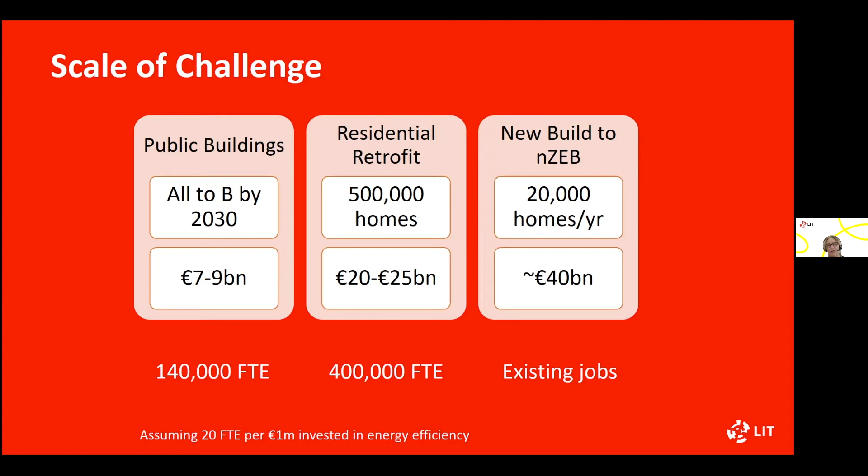So you can see there is huge potential for jobs and employment in this sector, but how we deal with it is the key. So there are multi-layered problems. Designing these buildings, getting the craft and construction workers to carry out the build. How do we manage to achieve this efficiently and effectively? Digitalization is one of the ways forward in this. Bear in mind when you're building or designing, you have to consider all the energy efficient changes and requirements and regulations, as well as the circular economy requirements, waste management, life cycle analysis, etc.

We need technical expertise. We need effective supervision and management. We need to monitor the works. We need to make sure everything's compliant, comparing the building performance gap, energy performance gaps from what's designed and what's being built. We need finance. How can people get finance? Not just for the construction workers, but also for the building owners and the homeowners. And of course, the customer journey. Never ever forget the customer journey, because the end product is for the client and for the occupants in particular.

So many of these workers need to be upskilled or newly trained. The customers also need to be made aware of what's going on, because a lot of people don't understand what's actually going on in the industry. So the workforce that is needed is to have new, updated skills.

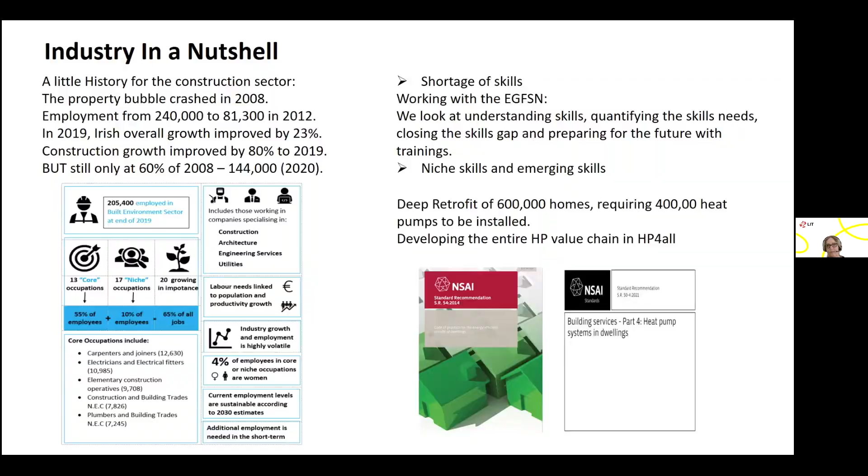So these are the key drivers. I'm possibly going to be going over time, so I'm going to have to speed up here.

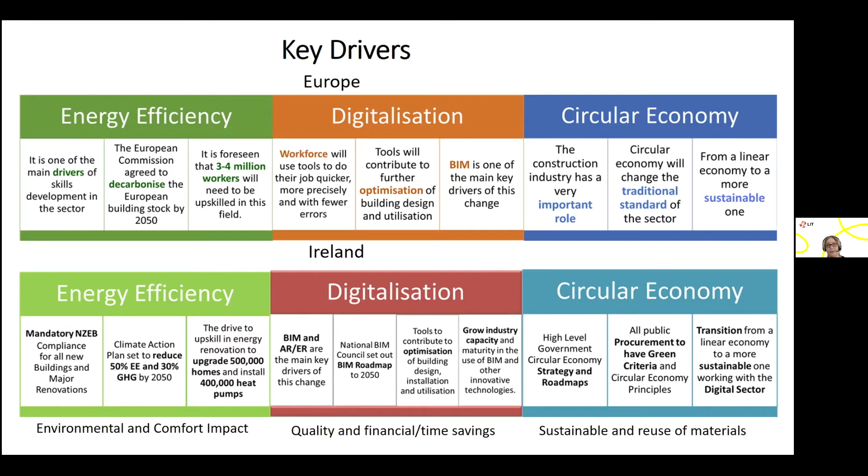For Europe, and I try to put it in the context for Ireland, significant drivers for energy efficiency with the Climate Action Plan. NZEB is mandatory, upskilling, major renovations of homes, as well as installing heat pumps. Digitalisation: for Ireland, we looked at the BIM roadmap using ISO 19650 and the tools for optimising these installations. And the use of BIM, AR and VR are the main drivers. And circular economy, the green criteria in all public sector tenders, so especially green procurement and tendering, that needs to be addressed, needs action in the digital sector to move this forward. So this is just a snapshot of all the different balloons which you can see.

But the terms of reference we used have been adopted now in Ireland, developing the ETBs, Education and Training Boards, at the moment. Huge backing from SOLAS to make sure that it's not just Waterford Wexford Education and Training Board that's getting the funding, all the other ETBs are as well. So the access for construction skills will be national. Now, HP for All, heat pump for all, I'll talk about that later as well, but that is mainly looking at heat pump design and installations. And then we have Superhomes 2030, which looked at deep retrofitting of houses. So the short trainings and micro learnings developed in BIMzeED, Construction Blueprint, BONRAS, BUSLeague and DASB will be presented a little later. And I'm going to apologise now for all these acronyms. There's so many acronyms we use in European projects.

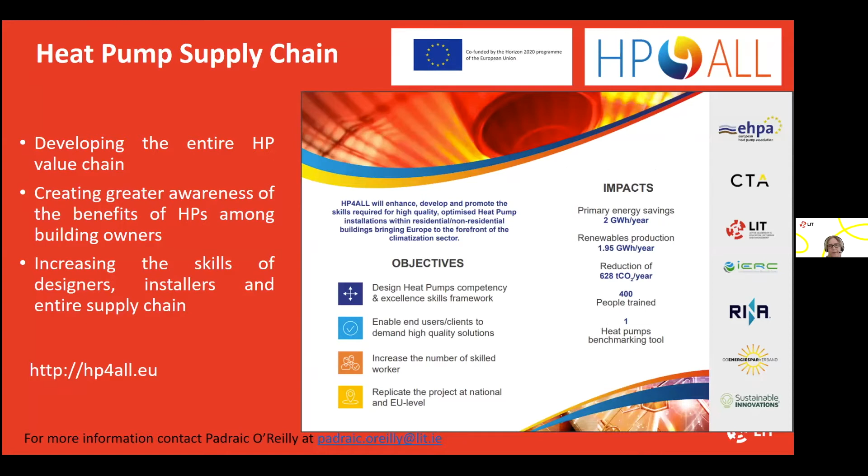And it's hoped to run in-house training. So if any large companies are interested, we're happy to assist. This training plan won't be ready till October. It's LIT's responsibility to get this.

So any help from the industry to help us develop this and work with other people on this, we'd be very happy to accommodate it. Just to note, there's also another green procurement project, Life Level project, which IGBC are running, and we're working with them. We're working on both these together.

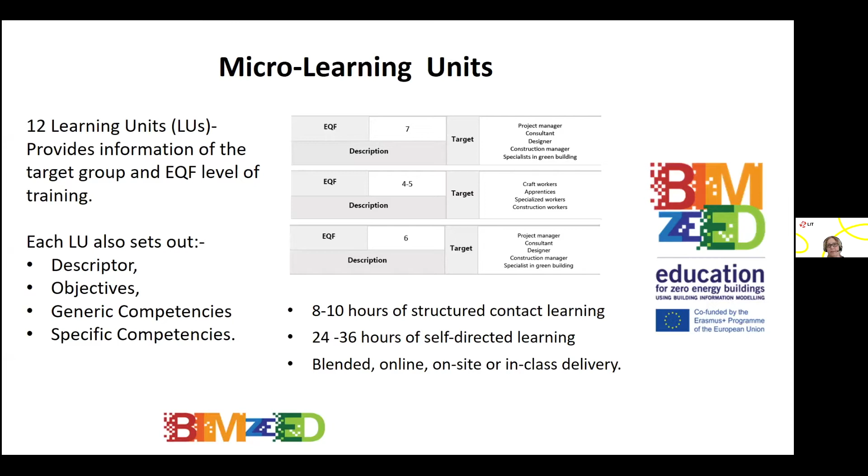So we have developed 12 learning units, all at different levels. And we use EQF, the European Qualification Framework. For our own national frameworks, we talk about levels 3 to 6. So they're short units with 8 to 10 hours contact and 24 to 36 hours self-study. And as I say, they can be delivered in any format that the training provider would like.

So after extensive research and surveys, a number of skills needs were presented, and we've chosen 12 of these topics as priority. Of course, there are other skills and knowledge gaps, and maybe we can develop them later in the future, maybe through DASB. So of the 12, 10 are available now, and the last 2 are available in April. So as you can see from the range, we do fundamentals, advanced use of BIM to achieve NZEB construction, specialised needs in facilities management, energy simulation and modelling, all at different levels.

So we're looking for trainers to run these learning units. Take a look at the website, bimzeed.eu, in the e-learning section and find out more about BIMzeED courses and for the trainers. If you go on the trainers section and complete it, you have access to all the material.

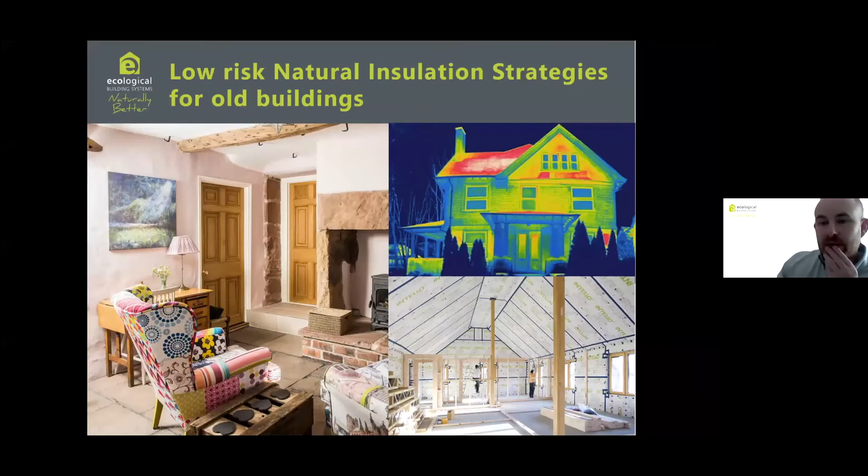Yeah, so first I'd like to thank yourself, Finola, for considering us today. I found your lectures very useful when I was in college, and I'm very grateful for the effort you had to put into us particularly. So I'm here to speak on behalf of Ecological Building Systems and myself, of course.

As a company, we supply natural building materials, and they often find their way into older buildings. So in this presentation, I hope to demonstrate some of the technical processes we use to support our recommendations to customers, homeowners and project developers, so that we can be confident that the risk is as low as possible.

Liz did mention there the scale of the task at hand, and Ireland does intend to decarbonise the entire built environment by 2050, which is of course to be applauded, but it's also a really big challenge, and there's a real possibility that some of these older buildings might fall by the wayside and quality might suffer, because out of the approximately 500,000 homes that have to be retrofitted, there's between 200,000 and 300,000 single leaf solid masonry construction type buildings. So they're quite vulnerable and quite sensitive to poor building methods.

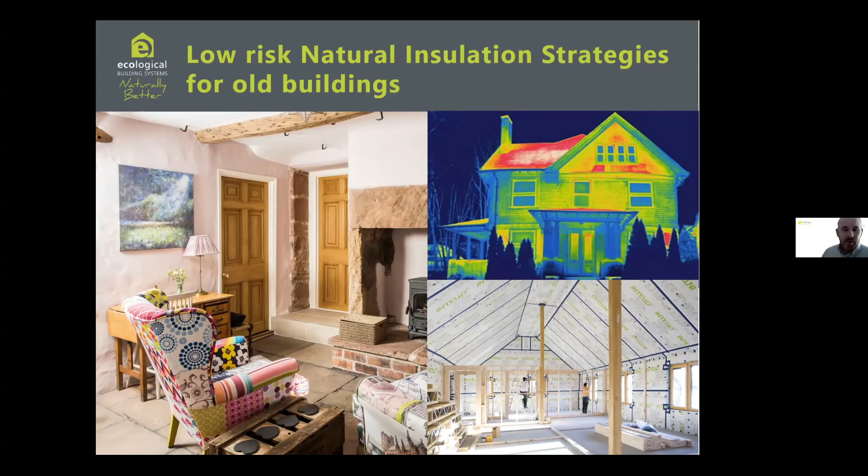So just a quick introduction of myself. I'm a former student of Finola's, and I spent a lot of time that I look back on very memorably with AIT and recently with TU Dublin. My background really is in energy performance in buildings, low carbon construction, sustainable design, things like that. And I'm also an NSAI certified thermal modeler and hygrothermal risk assessor.

As a company, we've been around since around the year 2000. We're born from a parent company that's been around since 1906. In those 2 decades, we've gained a lot of experience and developed a big technical know-how with plenty of material knowledge in these broad areas. In today's short presentation, I'll be looking at how we help people to build a plan with the right material type that suits a building. That's an important point because all buildings are very, very different. So no silver bullet will match every building type.

We'll have a look at the reason for the risk, which is moisture, particularly in Ireland, and its impact on traditional buildings. Then we'll look at how designers use hygrothermal risk assessment in accordance with EN 15026, the performance standard. It is the methodology recognized in BS 5250, the Code of Practice for Control of Moisture in Buildings. It's also recognized in NSAI SR 54 2014, the Code of Practice for Energy Efficient Retrofitted Dwellings, and in TGD Part L 2019 and by WTA, an International Association for Science and Technology.

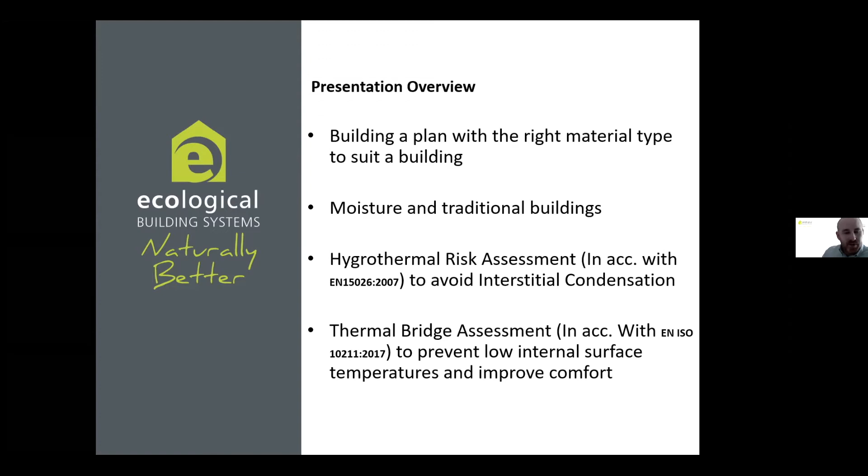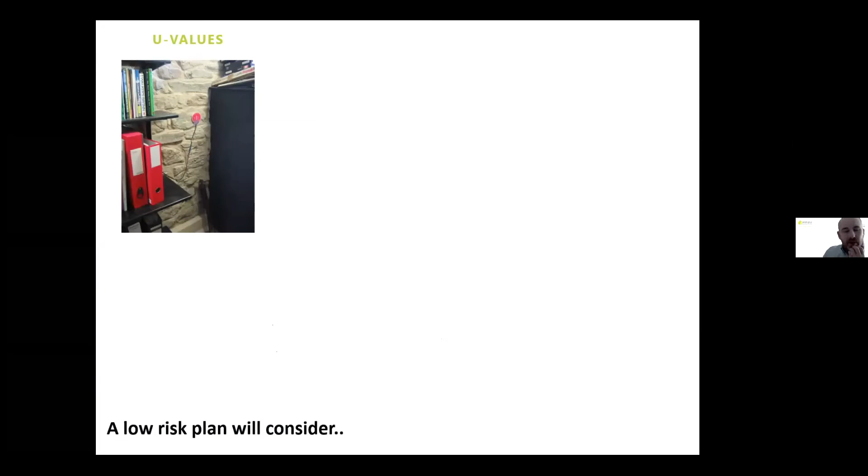So we'll take a look at how, generally speaking, a good plan will have to consider the U values, of course, but most people tend to put too much value on the U value. So a good building to them would be a building with good U values, when in fact much more comes into it. For example, where the heat loss might be going apart from out of the planar 2D elements.

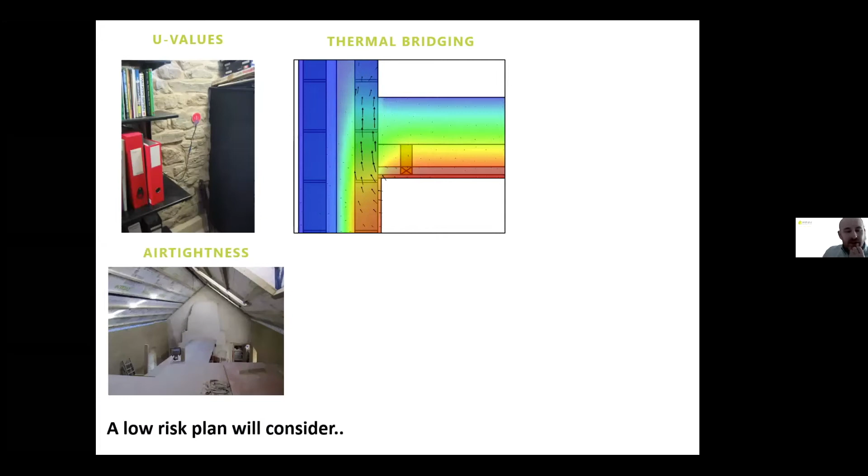Air tightness is a big consideration because it doesn't matter how good your U values are. If a building is drafty, it's going to be cold. Of course, the more airtight it gets, the more important ventilation becomes, and indoor air quality is linked to that. Fabric safety, learning how to know what's going on behind things. A huge part of heat loss is how moisture moves through buildings and where it might get up to no good as it does that.

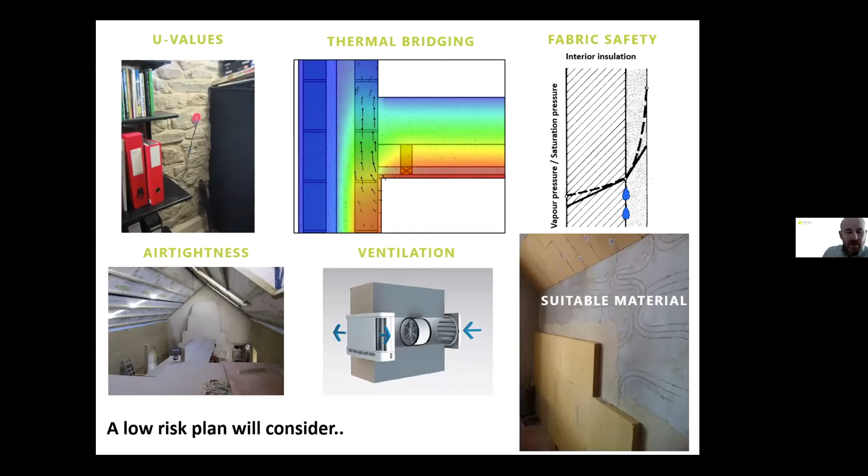And of course, trying to select a suitable material for the job, because not every material is the same. So a lot of people will say it's an old building, put something breathable on it. Well, if we take a look at this next slide, you'll see 3 very similar material types that we sell. So we sell wood fiber on the left, calcium silicate in the middle, and a cork and lime-based thermoplaster on the right. Now, it is true to say that they're all breathable, and technically maybe they're suitable in all old buildings, but you may have a case where you need to deal with excessive amounts of potential moisture.

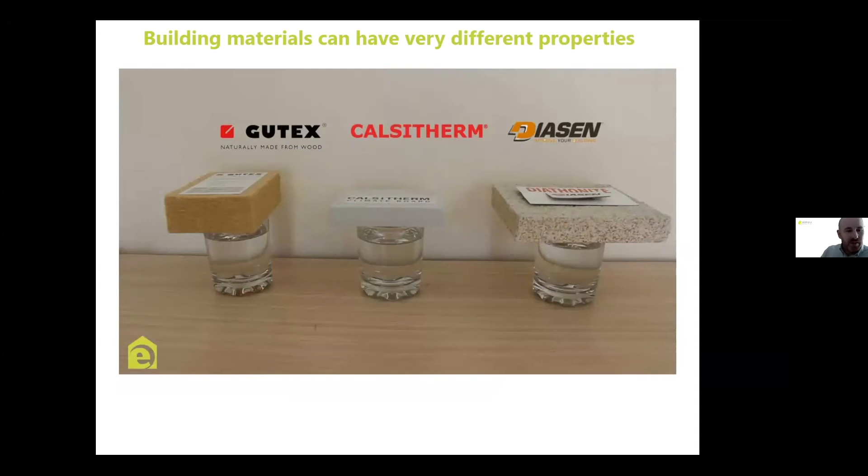Now, breathability refers to what a material can do with moisture in all its phases, so liquid, gas, ice, everything, and they all behave very, very differently from that respect. So I'll just play a short little clip and show you what I mean. This is a time-lapse video, and although they're all breathable, so moisture vapor will pass through them all, they all perform very differently with liquid water. So very often you might need something that would be referred to as capillary active, something that has the ability to store and transport moisture, to evaporate it when it's safe to do so when there's enough temperature and ventilation.

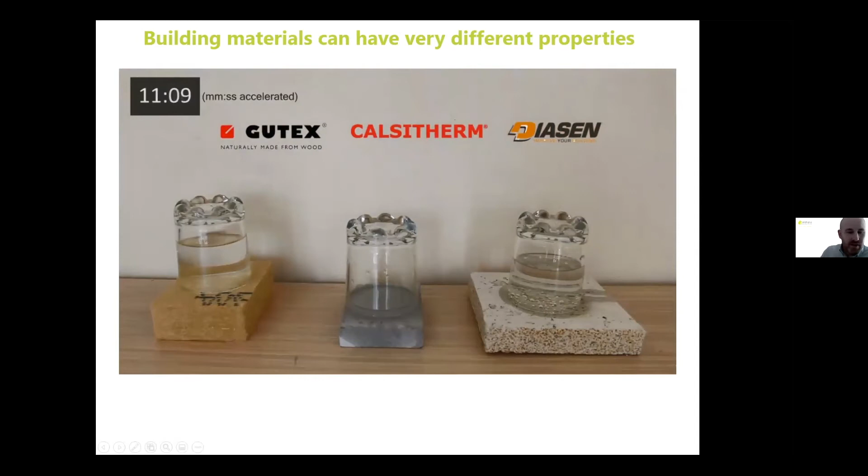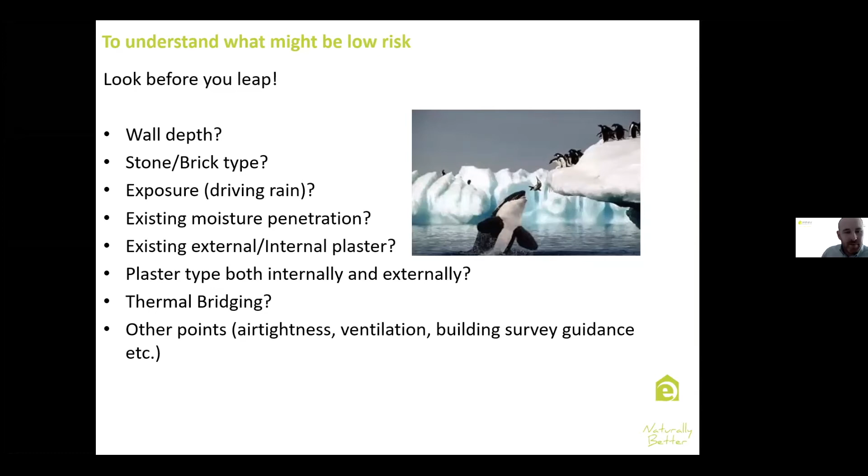So this is just a short sample to show you that even with building materials, there's a lot of technical characteristics that come with them that we need to be looking at more closely. So really it's just about building a good plan, figuring out certain things about the building. I won't go into all these in great detail, but knowing things about the building will help paint the picture and tell us what that particular building is, so we can have a holistic view of it rather than thinking that they're all the same, when in fact buildings are like fingerprints, they're all different. A good example of that would be, over the next 3 slides, I'll show you 3 old buildings, single leaf buildings, but 3 very different strategies were used.

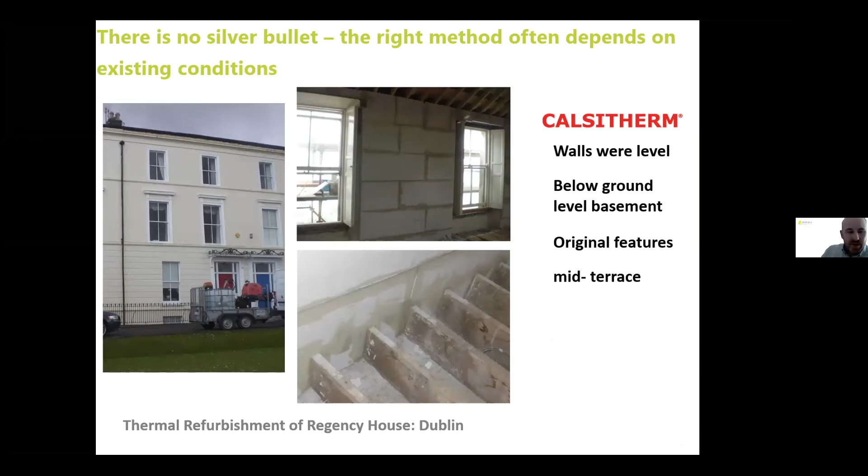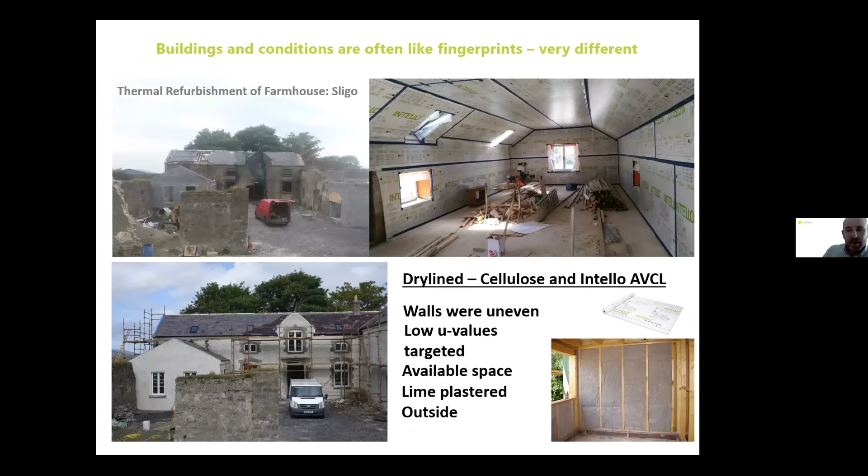For example, here in thermal refurbishment of Regency House in Dublin, they used Calsitherm because walls were very level, there was below ground levels, which was a higher degree of moisture needed to be considered, so they needed something capillary active. It had original features that needed to be worked around, and it was a mid-terrace dwelling. In the next building, we see a big old vacant barn type building that really wanted to target low U values, that had an external plaster on it. So it meant you could build a dry line inside on a very airtight vapor control layer.

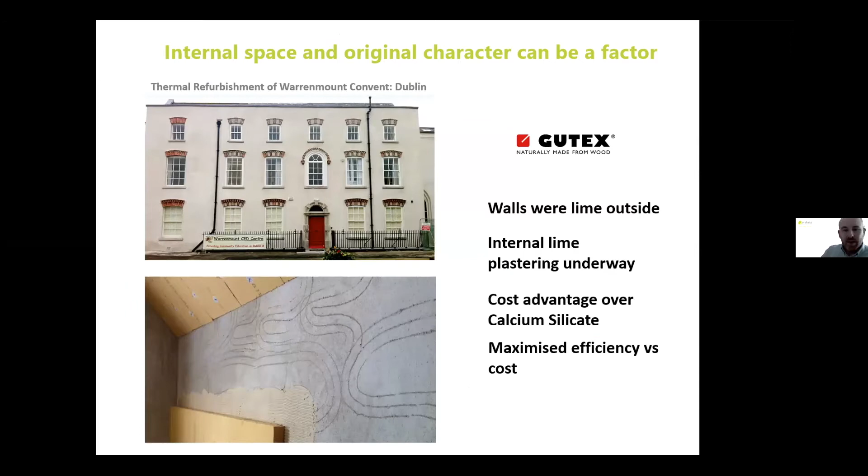Or for example, Warrenmount Convent in Dublin, where they had an existing lime plaster on the walls ready to go, and they had very well conditioned external plaster and features. So thermal capabilities of wood fibre in this case was considered optimal. Or you might have a wall where it's exposed stone. Now there could be a huge cost to level that stone with a lime so that you could get one of the other systems onto it.

So there are materials like our thermal plaster that you could just spray directly onto that exposed stone, and it's an insulation first and foremost. So it has very, very good insulating capabilities. It just happens to behave like a lime plaster. It's extremely capillary active and it's very breathable. Gives you the speed advantage of being able to do things at the right sequence after first fix electrical has been installed, covering huge area in a given day.

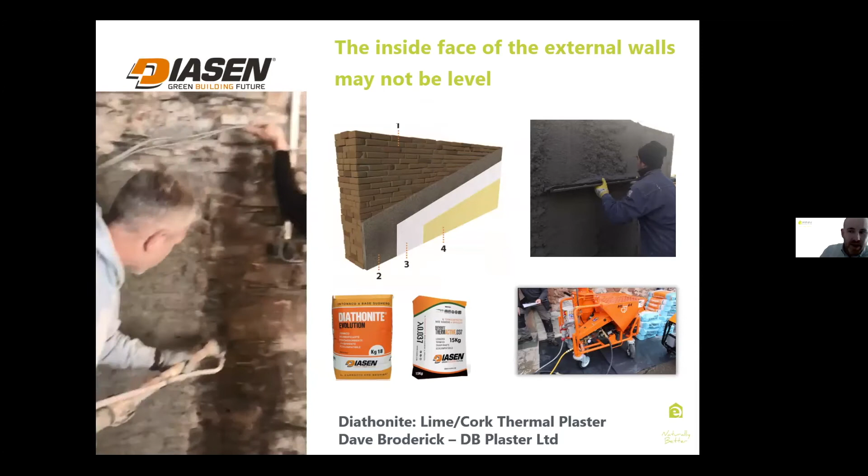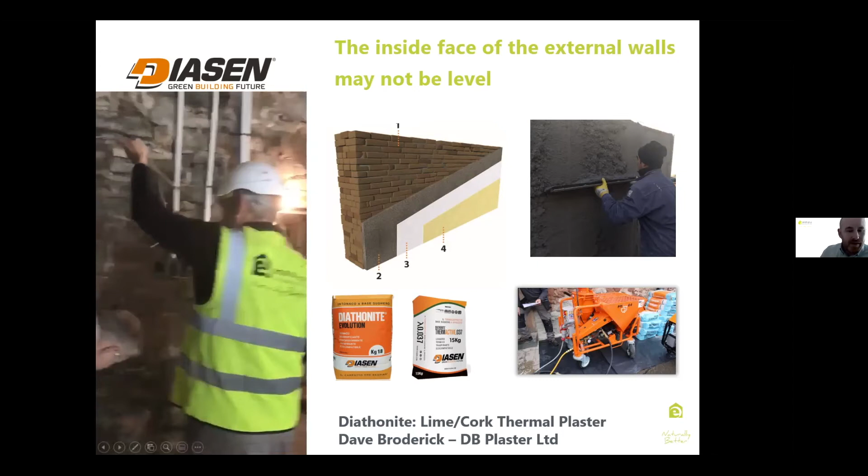So when those guys have the wall sprayed out to a given depth, that will equate to a U value, and then it's screeded off, skimmed and painted with a natural breathable paint. So as you can see, there's different strategies for different buildings, and you may have to consider the condition of the building also.

So a good example would be Dublin Civic Trust occupied this building, which is 18 Ormond Quay, and it's a fantastic example of how to retrofit a building to a very high standard. But in this situation, at an early stage, there were unsuitable surfaces, cement pebble dash needed to be removed, water goods needed to be repaired, external pointing and drainage and detailing needed to be addressed before it could be brought back into this century.

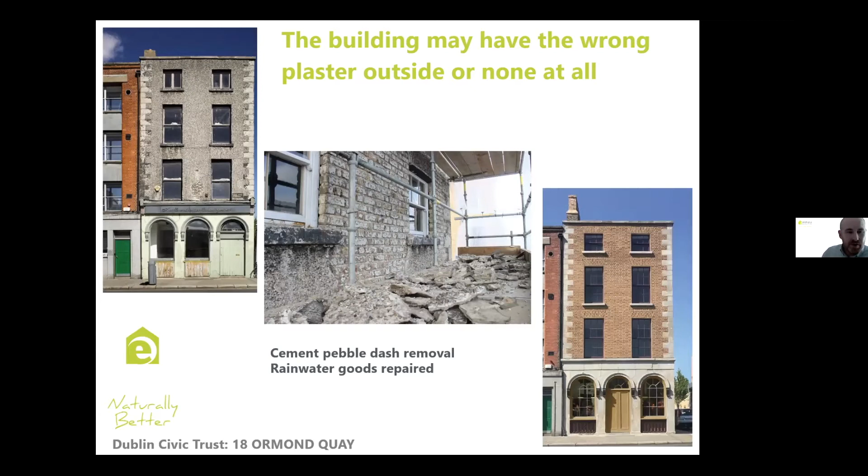And they did insulate some of the upper floors in that building with that thermal plaster that I just showed, and Calsitherm at the very upper level. So really what we're trying to get at is to avoid the issues caused by poorly considered retrofits. If you accept that figure from ASHRAE, 90% of building failure occurs because of moisture in some way. I would say that in Ireland that's probably higher, because in Ireland we have a very high degree of moisture at all times. And that moisture comes from everywhere.

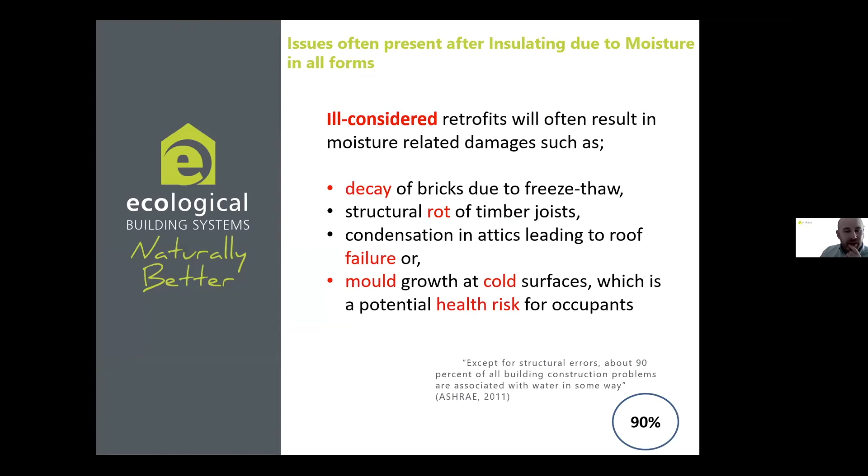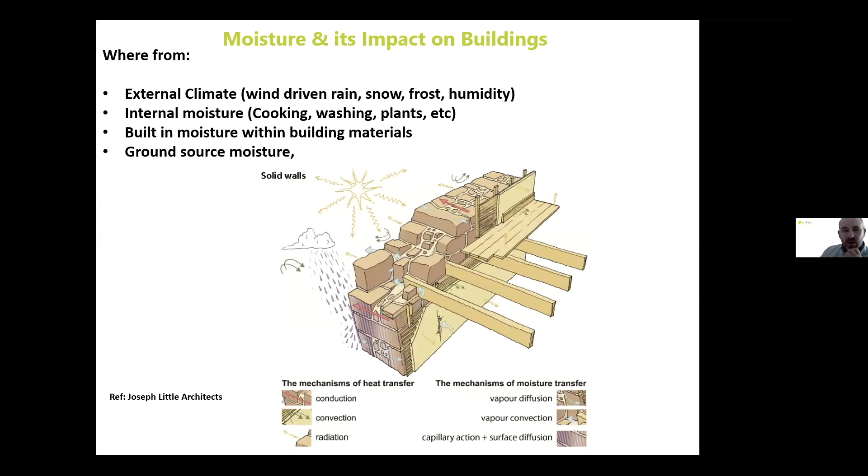This is taken from Joseph Little Architect's publication, and it just shows that we're constantly getting bombarded with rain, but moisture can come from the inside as well. So it can come from moisture vapor diffusing through a material or being carried by convection through cracks in the openings, where it gets into the colder structure and then begins to condense and cause all kinds of problems.

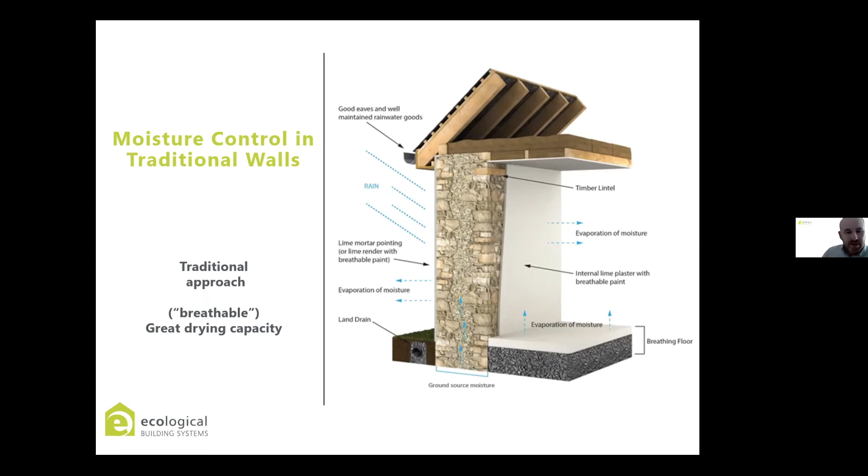Now, in the past, the way we used to build used to allow us to deal with that. So we used to build in this vernacular way, where we had good land drainage, we had great surfaces, lime plasters, we had well-maintained rainwater goods and breathable surfaces internally. And a building like that would have a high evaporation profile. It would be able to dry to inside and outside. So yes, it would get wet because we're in Ireland, but it could also dry. So it was constantly in this cycle of dealing with that moisture. And that moisture is ever present.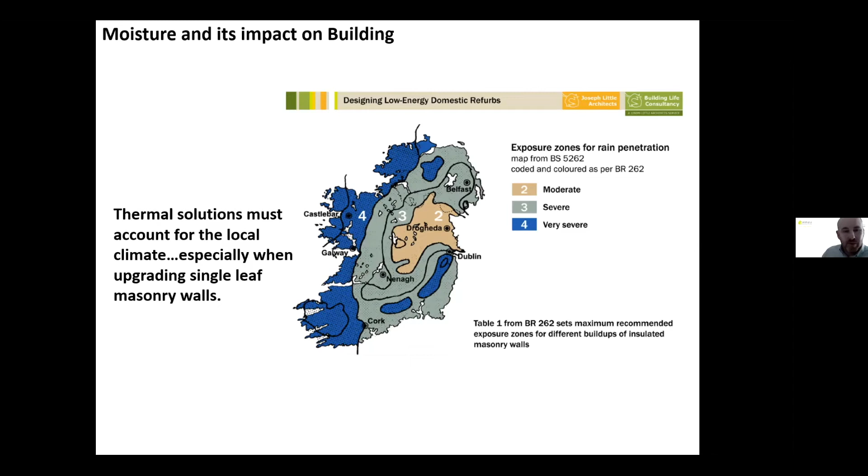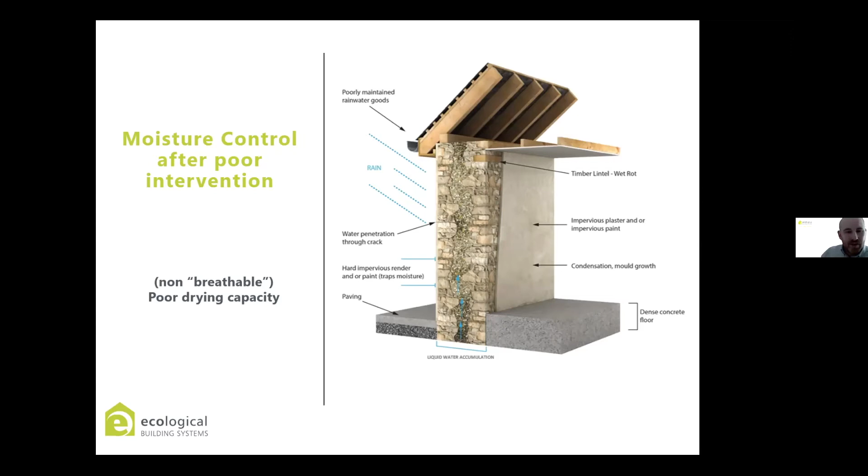And when you apply poorly installed building materials, things that are unsuitable on older buildings, like for example, you replace the good drainage with paving outside, or you have concrete surfaces placed internally on the floors, or you apply cement renders to the walls, what happens when water gets into that wall is it begins to accumulate, and it gets worse and worse, and then you get blown plaster, cracking, interstitial condensation, rotting timbers, and the fabric safety gets worse and worse. So the same thing is true for boards.

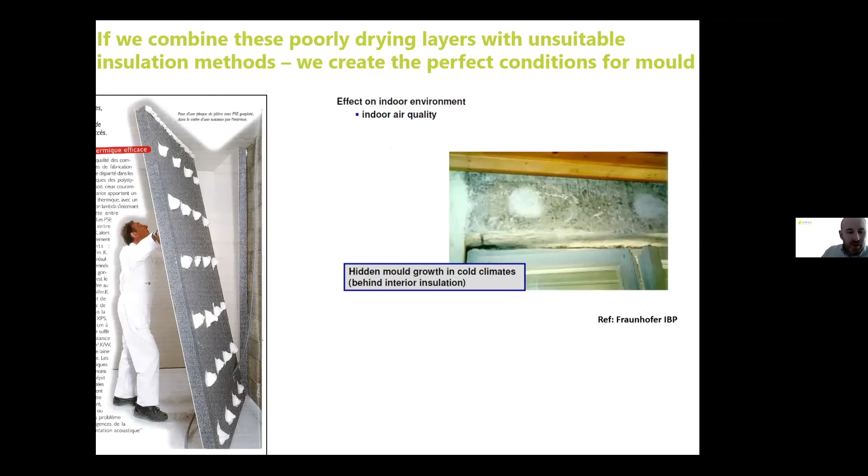So this board, being a phenolic type insulation pressed against a wall, has the ability to potentially trap warm, moist air behind it, creating the perfect conditions for mold to thrive, which is what happened in this situation behind an ill-conceived dry line with a plastic membrane that had gaps in it, that wasn't airtight, had cold surfaces and gypsum plaster, providing a good food source for mold and nutrients.

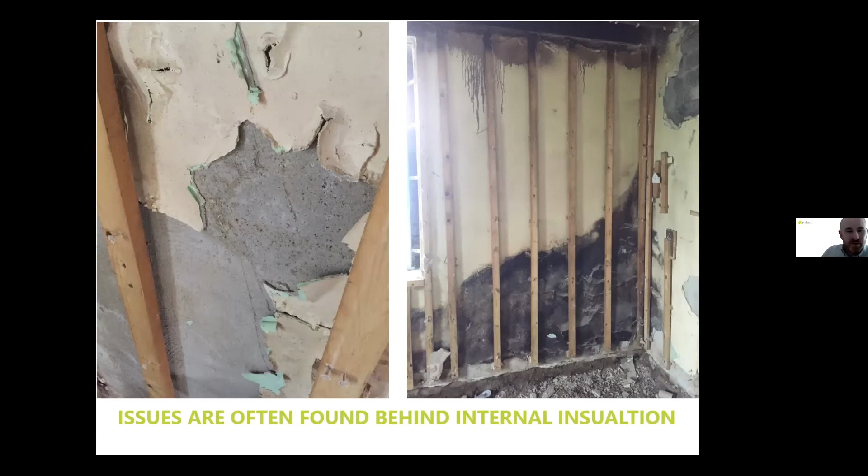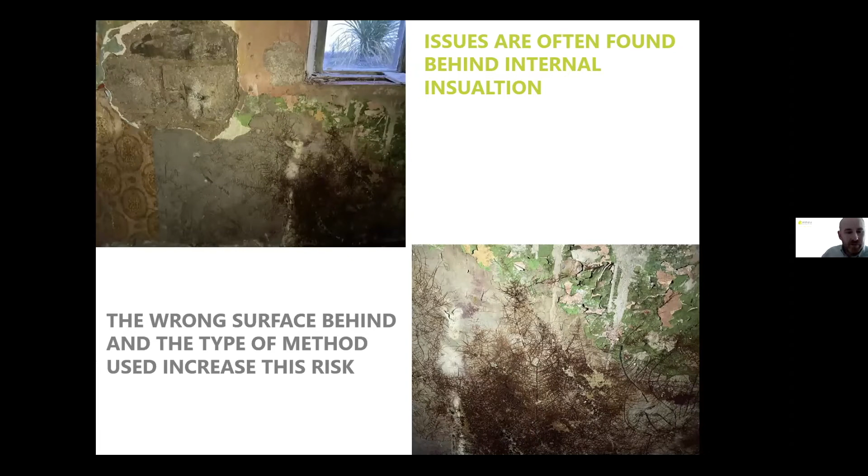Likewise, in this building that I was in 3 weeks ago, this is an old gate lodge where behind the kitchen units, there were voids created behind some really badly fitted insulation and an old gypsum skim plaster that shouldn't have been there in the first place. But it just goes to show you that warm air will find its way in. It'll always condense on the first cold surface it meets. And if you give it those conditions, it will thrive. So this is what we're trying to avoid. So one way of avoiding it is not to build dry lines off walls.

Don't leave space behind insulation like it shows in this image, unless the space is completely ventilated to the outside, top and bottom. And you'd have to do that in multiple locations. And even at that, you're kind of hoping for the wind to be blowing in order for there to be an air transfer behind insulation.

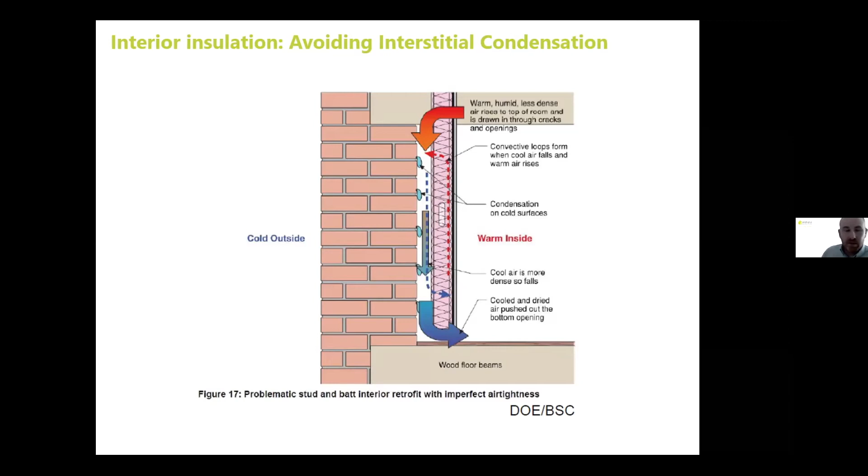But if you don't have a ventilated space there, what will happen is warm air leaks in behind the dry line. The red arrow shows that at the top. And as it gets cooler, it begins to get denser. And as it gets denser and cools, it loses its ability to hold that moisture. So it releases it on the cold surfaces, which is what we saw a minute ago. Things like this occur in an unventilated space. So we need to avoid stagnant air gaps and pockets behind insulation.

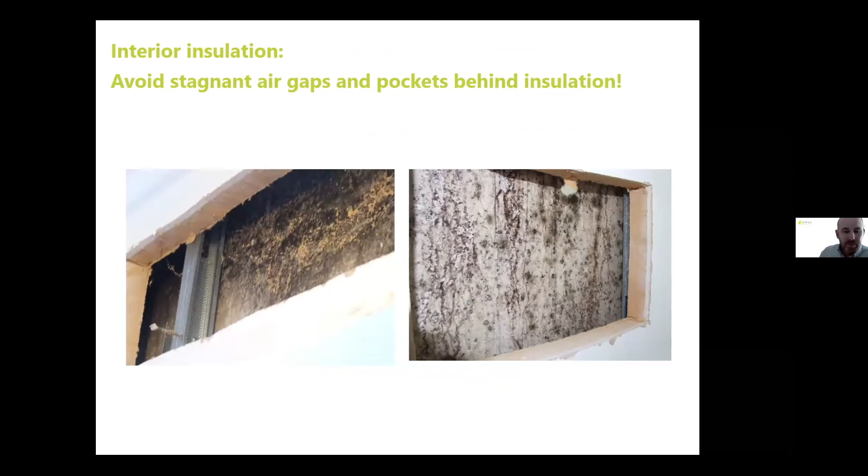So of course, it's more than just wishful thinking and hoping we're doing the right thing. As a company, we use this methodology. We use WUFI numerical simulations, and we carry them out in accordance with EN 15026, which is the convention mentioned in Part L and NSAI SR 54 2014, etc.

It's a computer-assisted simulation program, a dynamic software where you can perform a transient model and input data about real-life climatic conditions, day and night temperatures, time of year. You can run this model over 10 years, 20 years, to see what happens, to draw a picture and to gauge what type of risk a certain strategy might have. So it's a very useful software, and it's done in accordance with EN 15026, which provides much higher accuracy than a standard dew point method, which would be carried out to EN 13788.

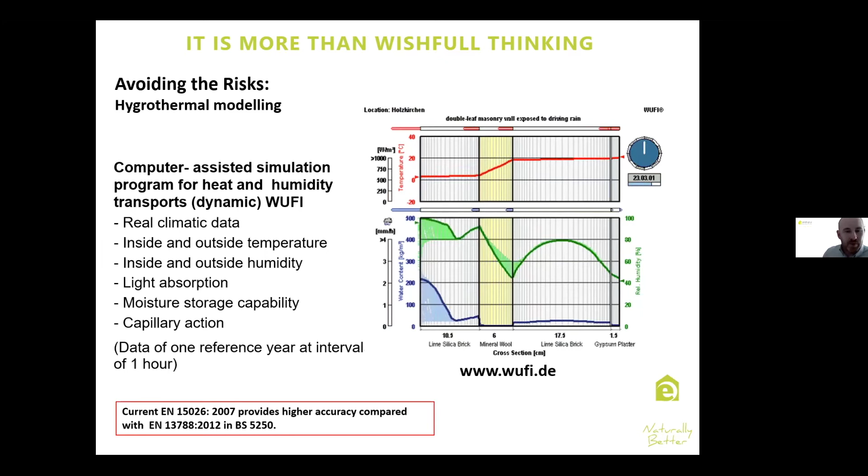Dew point can only tell you what's happening when vapor moves from the inside to the outside. So it's completely ignoring everything else: the storage capacity of the wall, potential defects in the fabric, temperature variations and fluctuations. It can't cope with that kind of thing. So this type of method is much more robust.

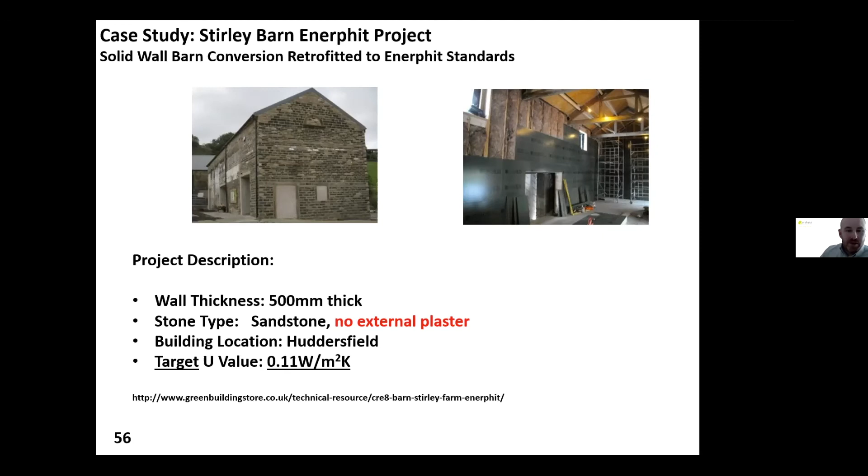And just to show it in a real life situation, this is the Stirley Barn Enerphit project in the UK, where the U value targets for the walls were very onerous, 0.11, which is very low, past the standard U values for an internal wall insulation strategy. The look of the building was very important, so they couldn't insulate it outside. So the only option really was to build a big frame, insulate it internally, essentially creating an internal timber frame off the main structure. But the real question was, did that space between both need to be ventilated?

Because it had an impact visually on the outside of the building, it had an impact on cost, it had an impact on even the daily arguments that would go on site, things like that. So the only way to really assess this at an early point was to take a look at it on a dynamic simulation using WUFI. And on the basis of no ventilation in the cavity, you can position probes virtually in the software, and you can monitor a certain position.

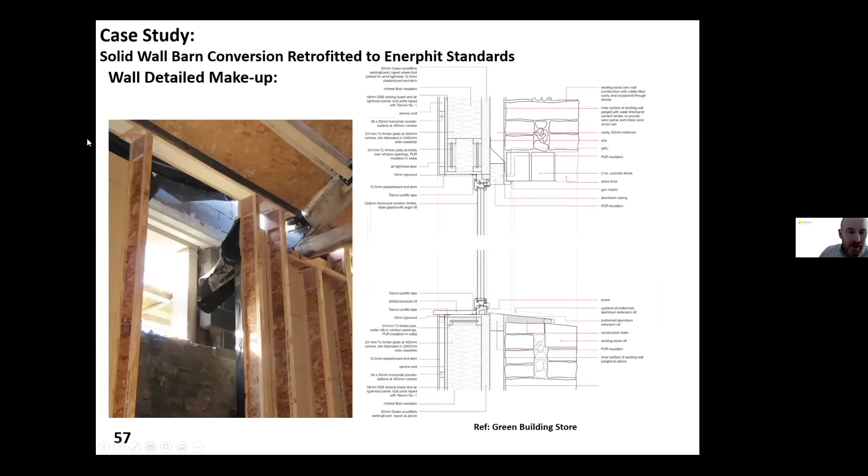And the main position of interest was the wood fibre at the back of the frame. I'll just go back to it for the moment. On the back of that frame, you can see wood fibre is positioned. It's the secondary insulation layer before it meets the stone wall in the space. So positioning a probe on that virtually, on the basis of no ventilation in the cavity, we carried out this numerical simulation with WUFI, and we monitored the moisture content of the external wood fibre.

And without ventilation, its moisture content increased to over 44% after only 7 years, which indicated a really high risk of failure. Because with wood-based products or wood, you're starting to get into that dangerous territory once you hit 18%, 20%, 22%. So again, this rose to over 44% in only 7 years.

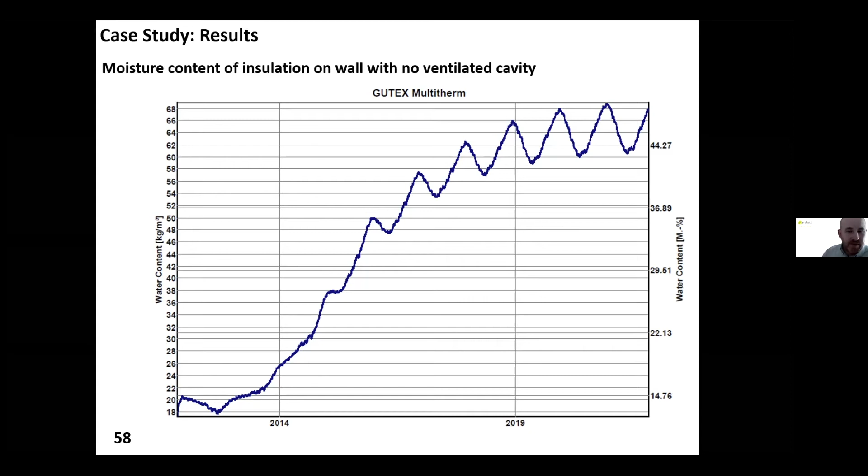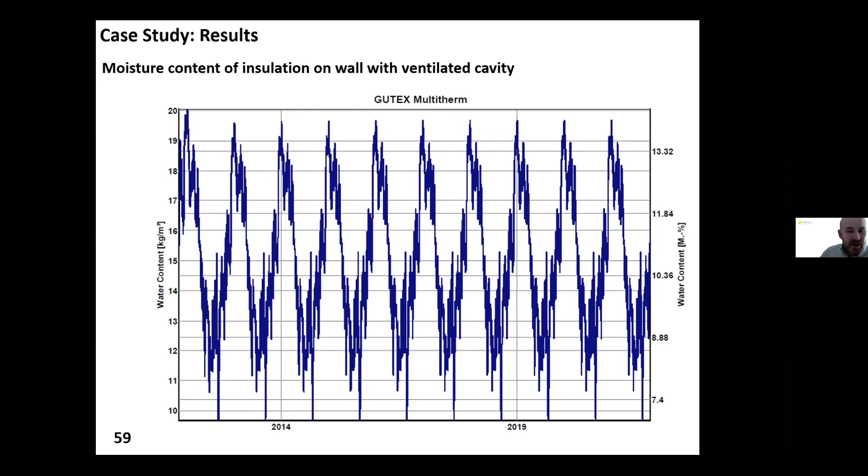By simulating ventilation in that space, on the basis of including ventilation in that cavity, we carried out the same simulation. And with it, we found that it remained at a really stable 10.5% average for 10 years of the calculation, which indicated a really high level of safety. So the inclusion in this case of a ventilated cavity proved crucial for that specification.

So again, a part of eliminating defects internally is ensuring that you don't get cold surfaces, for example, an uninsulated reveal, and that you have sufficient ventilation, because a combination of poor ventilation and high humidity will always result in surface condensation and mold growth.

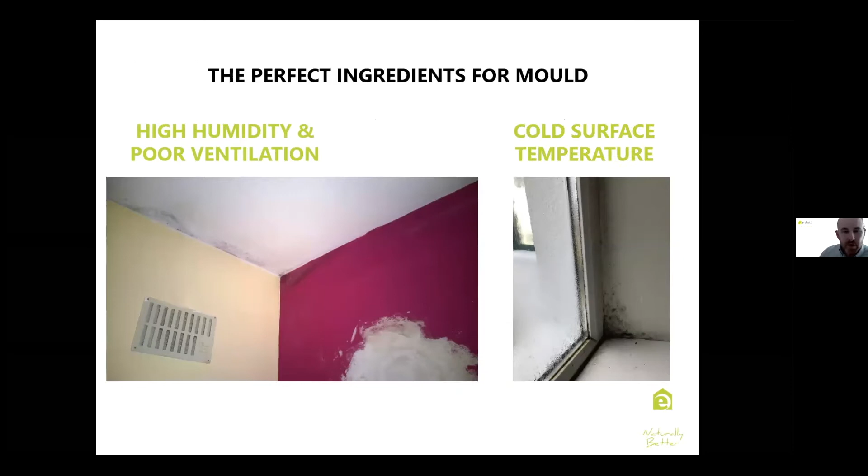So if we take a look at an uninsulated wall, and this is where thermal bridge assessment kind of comes into it, an uninsulated wall will lose heat very uniformly. So those little arrows or the vectors are showing that when it's 20 degrees inside and 0 degrees outside, heat just gets lost through every surface, and every surface is cold as a result.

Now, what happens in very old, inefficient buildings very often is, you're drying clothes, you're making dinner, you're having baths and things. So there's high humidity in the space, and it condenses on these really cold walls, sometimes running down the wall, presenting as what some people think is rising damp, but it's being misdiagnosed. It's actually surface condensation. Things like salt defects can present as a result of the high humidity on the surfaces. So you get this in old uninsulated buildings.

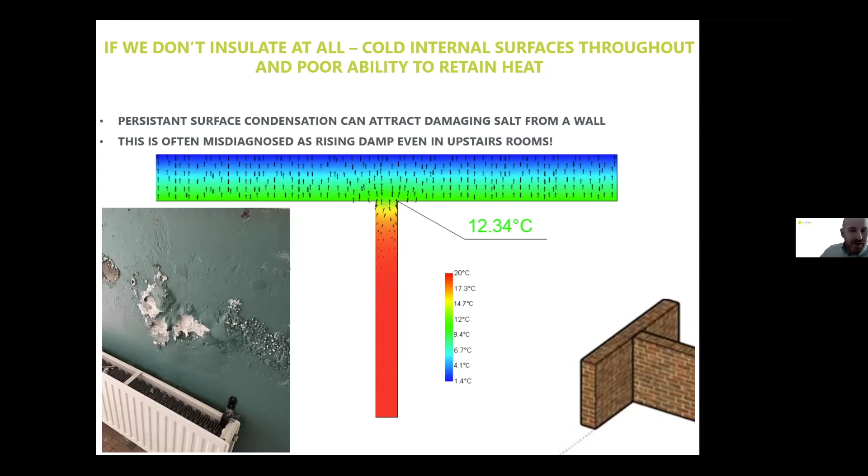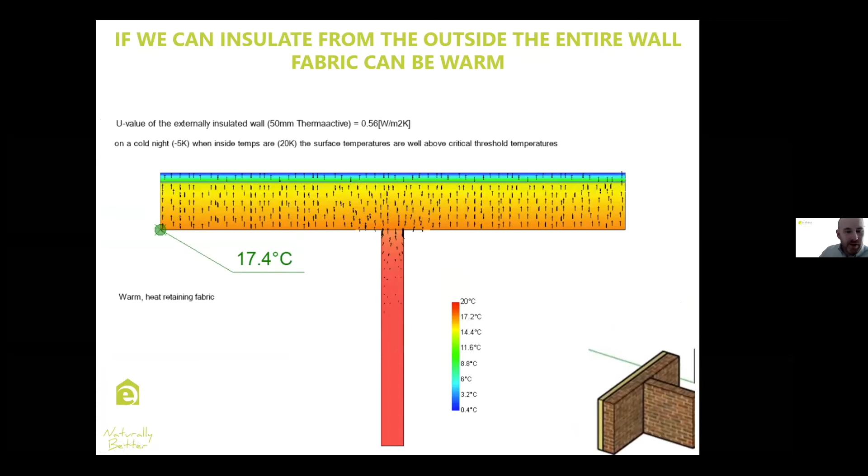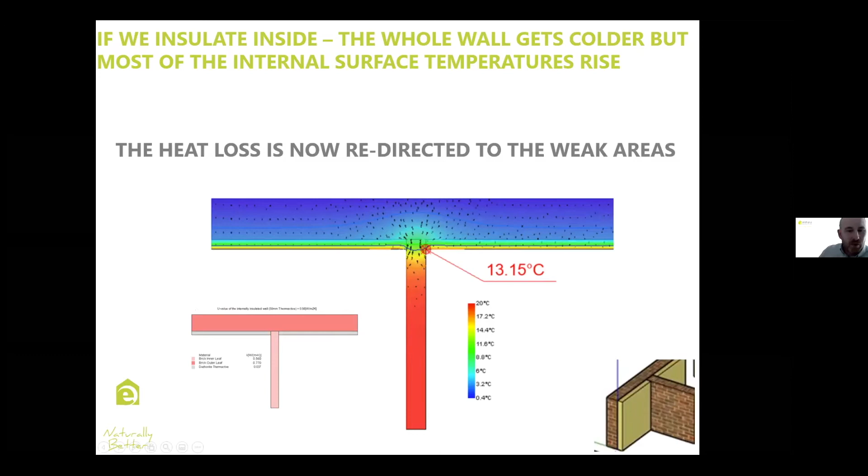So really what you're left with is internal wall insulation, or IWI. And if you insulate internally, very often what happens is you magnify the heat loss in other areas. For example, that intersecting internal wall where it structurally ties into the external wall. So notice how the vectors have really shortened across the wall. The wall has got colder as a result of less heat getting to it. But as you move towards that middle wall, you see that the vectors are sort of rushing out. So the heat is rushing out in those areas. So you can often get mold growth in corners and at ceilings as a result of IWI being poorly planned.

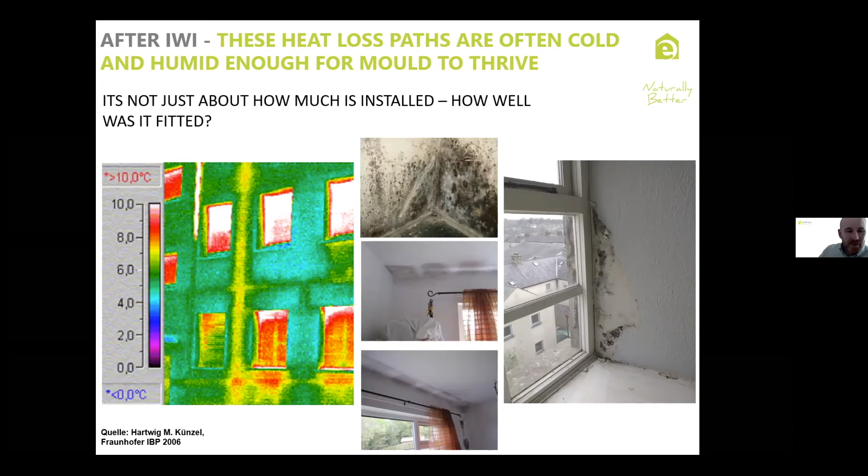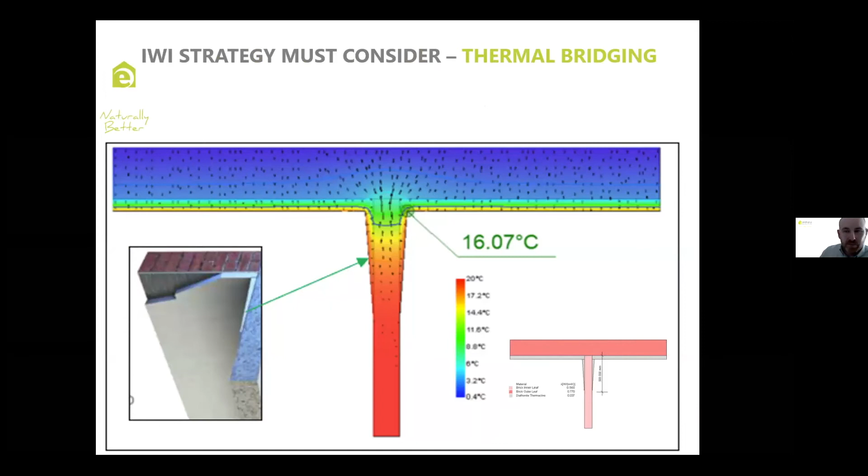Things like this and the thermographic image outside the building would show what it looks like from the outside on a cold night, and the spots on the walls are as a result of not being able to detail thermal bridging correctly. So often with IWI, we have to go that one step further. We have to insulate, in clever and aesthetically pleasing ways, into the hard to reach zones, the areas that might be influencing heat loss overall. The difficult to do areas are the ones that really make the difference. But we have to try and join the dots between what's upstairs and what's downstairs. We have to get into those zones and detail for air tightness as well in order to make the most of an internal wall insulation strategy.

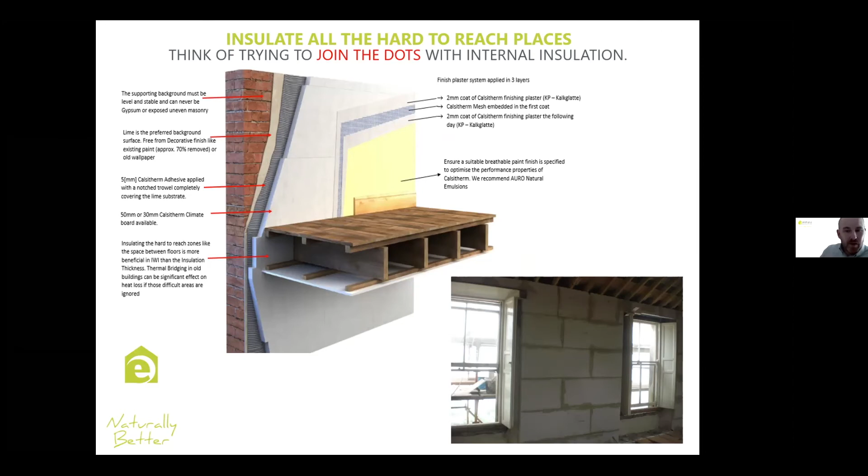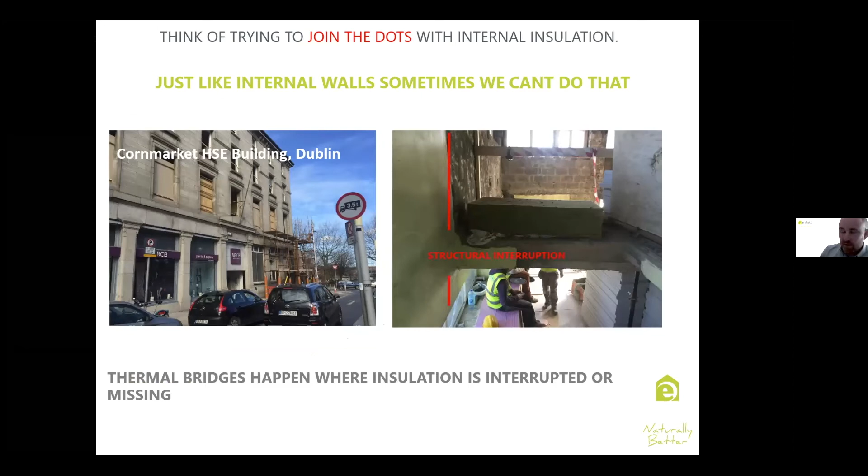This happened in this Cornmarket building in Dublin, which is the HSE building. And on this site, a colleague of mine noticed that if they insulate above and they insulate below, there's a natural structural interruption running right through both insulations. So joining the dots in that situation is difficult. Looking at it with thermal bridge assessment, we were able to predict that there will be a low enough surface temperature as a result of insulating above and below that it might actually fall below what's considered a critical threshold, which is often referred to as the FRSI value, or 15 degrees. So in this case, we found a temperature of 9.4 degrees.

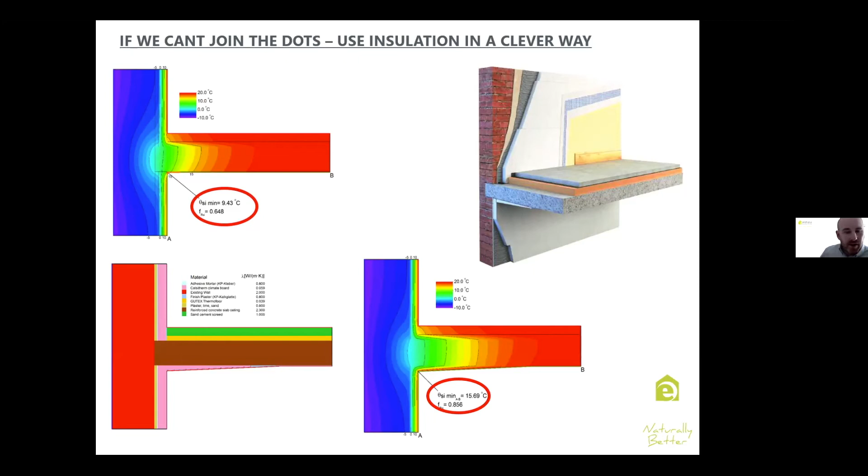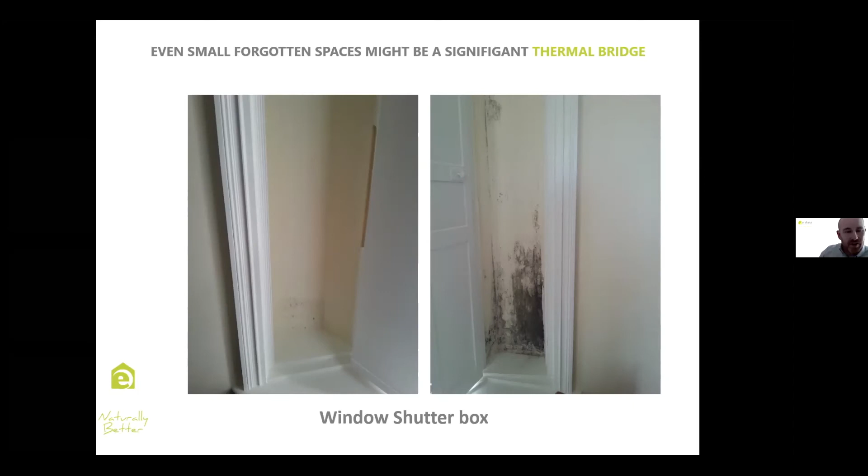So it was proposed that they insulate beneath with a tapered board. And in fact, they just used the normal board because there's a drop ceiling going in. But it was found that by doing so, they could elevate the temperatures to over 15 degrees, creating a degree of safety. And again, even leaving out things like window shutter boxes can create the perfect conditions for mold, because you'll end up getting heat rushing into that area, trying to get out, creating those cold conditions. So the idea is come back, clean it off, insulate into it, and that will cure that issue.

So really, that's the end of my presentation. And just to conclude, it's worth noting that you can't cover everything in one presentation, but each retrofit case is different. So a holistic approach is required, especially if we're going to meet this task head on and do it without affecting our older buildings. Moisture in Ireland is always a risk. Natural materials share many of the performance attributes that old masonry construction requires. So capillarity, high pH, so it's caustic to mold, breathability, good thermal ability, things like that. Using hydrothermal risk assessment EN 15026 can help guide decisions and make better decisions.

Detailing out thermal bridging will help prevent low internal surface temperatures and improve thermal comfort overall.

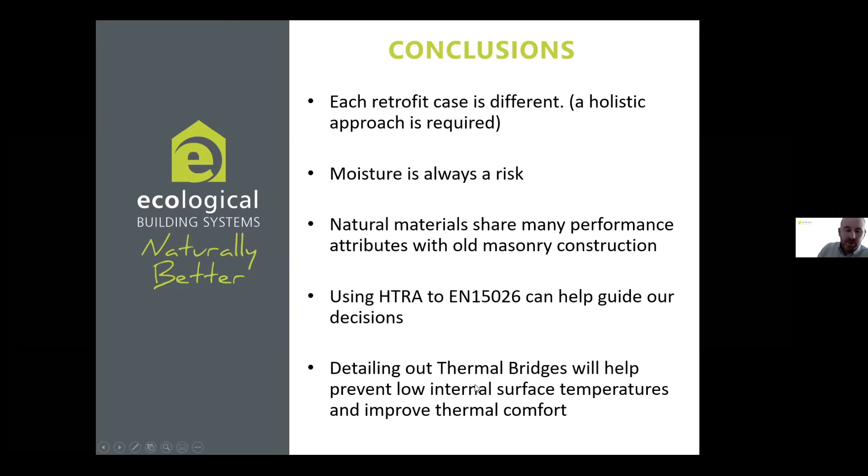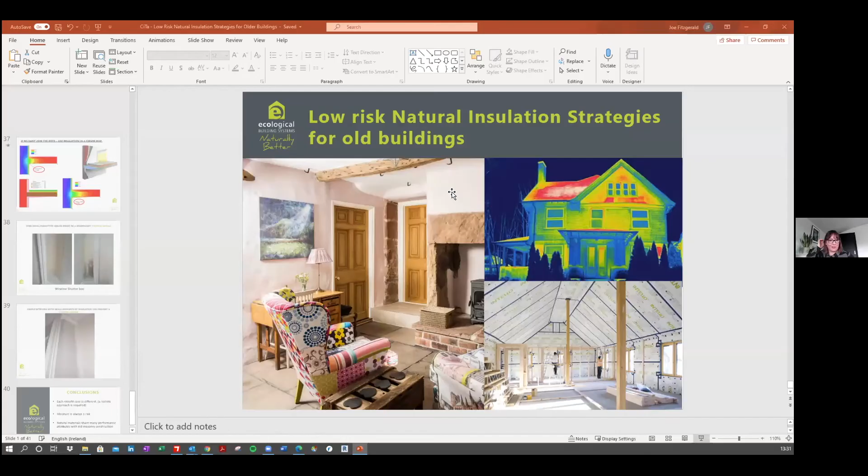So, yep, thanks again for listening, and I hope you got something out of that. Thanks so much, Joe. I'll say it again, the student has become the master, so kudos. As I said, I'm always thrilled. Not that I do very often have students coming on to speak, but it's absolutely my pleasure.

And it's very close to my heart, the whole conservation and retrofitting of traditional buildings, and very much at the forefront at the moment from what the government are hoping to plan for recovery after this whole COVID mess. So I'm sure, like Liz's talk as well, the whole renovation, the scale of work that's going to be needed is terrifying, to be honest. And getting the skilled personnel to do it. Huge, yeah, it's a big part of it.

But even myself and yourself and professionals in the industry are constantly upskilling. I'm just after coming out of TU Dublin, upskilling myself, and it's really in reaction to the drive that we're seeing, and to go back to a point that Liz made earlier about even builders merchants requiring a level of upskilling. Well, I'm involved at the moment in trying to do that for some of our merchant stockists, because you're right, they sell 5,000 to 10,000 things in the shop, and you can't be an expert in everything, so they need support also. The industry needs support, and awareness is really a big part of it, I think.

Absolutely. And I had the pleasure of going to Ecological Systems there in Athboy, am I right? Yes, that's right. Fantastic hands-on workshop. I think I did the airtightness testing there, but unlike some talks where you come away with a pen and a piece of paper, I came away with goodie bags, with the Gutex and things like that. So if the COVID passes, your training workshops are second to none up there. And your WUFI that you do, is that part of your technical department?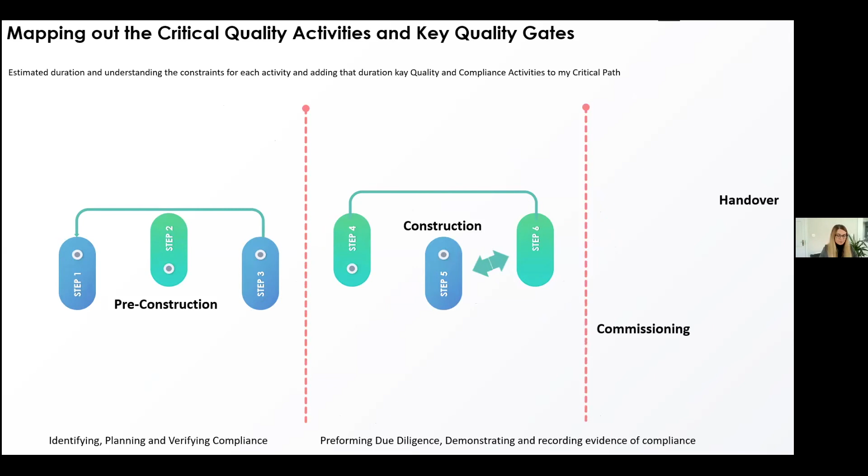So by estimating the duration and understanding the constraints for each activity and adding that duration to the key quality and compliance activities to my critical path. So by identifying and planning compliance in pre-construction,

what I'm doing is I'm determining the quality requirements. So as discussed already, I'm taking them from my employer's requirements. I'm saying the processes, procedures, and people that will be involved in the project. I'm preparing my preliminary inspection and test plan. I'm going to describe how I'm going to meet the specification requirements, and I'm also going to see how I'm going to report within those requirements.

When it comes to the design submittals and reviewable design data, I'm talking about my drawings, my subcontractors, my materials, my method, and also my O&M materials. So all that information I need to get approved by the reviewers. I need to do all that before we get into the field.

So by understanding how long this process takes to get our formalized design and to get the right subcontractors who will be able to carry out the works in the field, I need to understand who has to approve it. Maybe my design team have to approve it, and then maybe afterwards it has to go on to the client to have further level of approval.

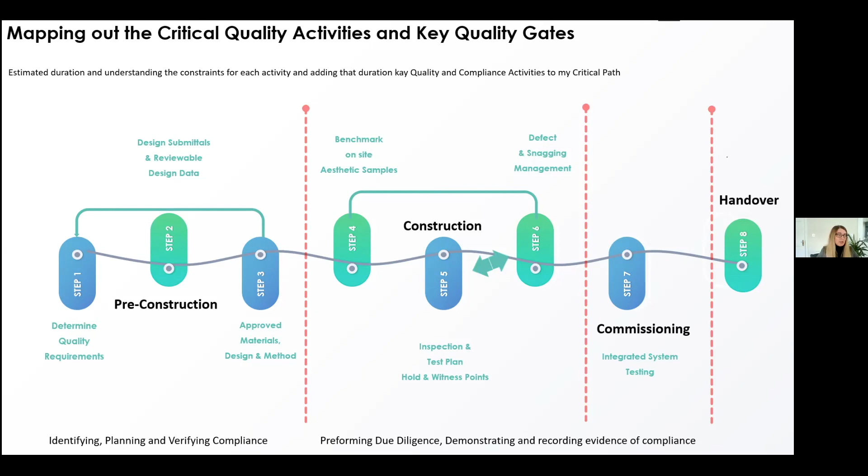So I suppose that's my slides for today. I want to finish up by saying leadership is not an expertise, but a continued education. I'm currently working with AIT in the course design of the quality engineering, BCAR and quality management courses. These will be accredited courses and provide the learners with the right skills to excel in the field and the qualification to get there. So they'll be learning and training at all levels, level 9, 8, 7, 6, and professional CPD with credits towards future studies. So thank you very much.

Thank you so much, Alice. Again, I always love your presentations. To put us to shame, I think there's probably a few open mouths there when quality wouldn't be a term that's often used in construction. And even though you're working with BAM, I think you did say it at the start, it's applicable to any construction project. It has to be applicable because it's the law. People think technical guidance document or regulation. It's the law. And the process you went through there could be applied to small and medium contractors. It has to be applied, I suppose, is also the point of the talk today.

Yeah, no, it absolutely does. And look, I've just scratched the surface there today. If I didn't keep motoring through, I could spend an hour chatting about each slide, but I didn't want to overload you with information. It was really just to give you the idea of how we plan and why we plan, so that we can try and get it right.